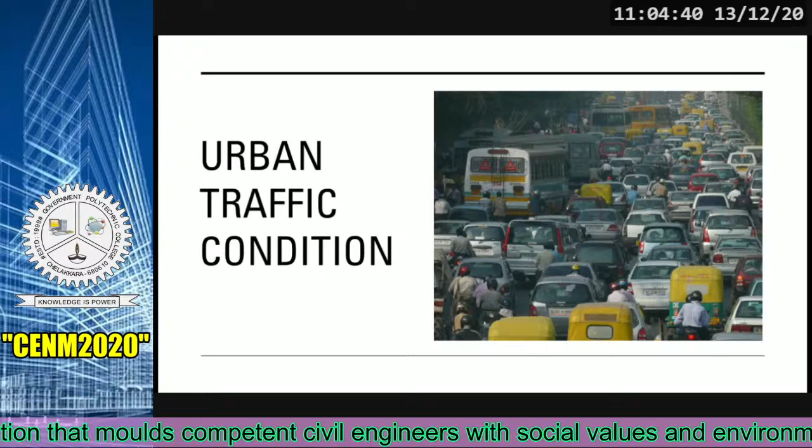Next, due to the high real estate values, the setout of the building will not be followed, and hence the destruction and reconstruction process will be a million dollar question.

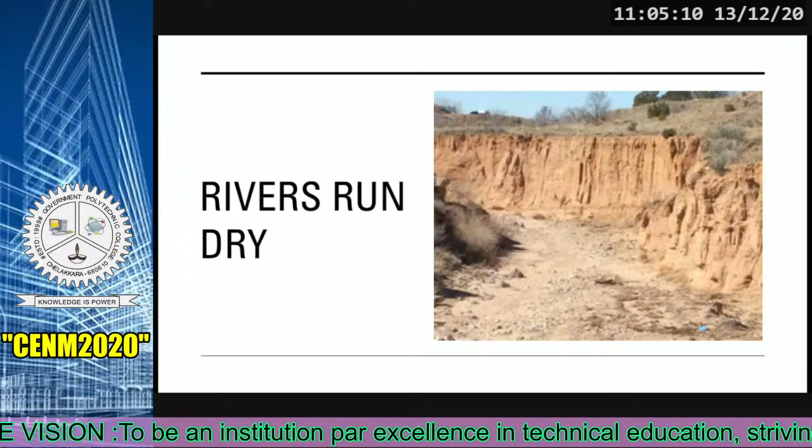Next, due to asymmetrical geographic conditions caused by man-made activities like interruption of water flow and unconnected water bodies, there will be a shortage of water in the construction industries.

Next, there is going to be a major problem: the skilled labor shortage. In this new millennium, life is cozier and every child of a laborer is educated, which is good in one way, and hence there arises a shortage of skilled labor.

In the field of construction industries, theoretical studies will only help to model a structure, but they do not help in field work. Construction practices are done by laborers, but not by engineers. In the future, there will be a majority of engineers, but not laborers.

Next, there are a lot of issues that are going to be faced in civil engineering in the future. Where there is a problem, there is also a solution. The best solution to have a better civil engineering in the new millennium is artificial intelligence in the construction industry.

First of all, what do we mean by artificial intelligence? Artificial intelligence is defined as the ability of a computer program or machine to think and learn. It's nothing but a branch of computer science building smart machines capable of performing tasks that typically require human intelligence.

It can be said that human intelligence is equal to artificial intelligence. Then what are going to be the processes involved in artificial intelligence?

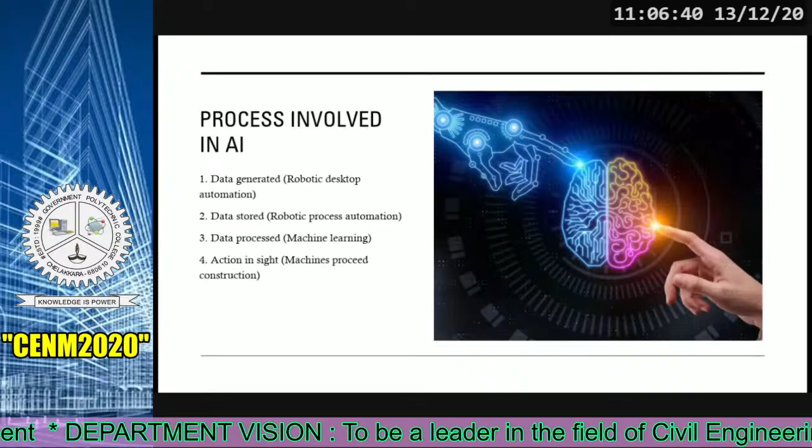The process like data generation: the requirement of work to be done will be generated as data, and the data will be converted into algorithms. The algorithms will be stored in the memory chips present in the robot, as like as the human brain. The stored data will be processed, and that's termed as machine learning.

After the processing of data, the robots will be sent to site in order to expose to more data by using big data analysis. And in the final stage, the performance of the task, the action, will be achieved.

Next, we have to know certain technical terms in artificial intelligence. First, the algorithm. Algorithm is a robotic language, as how we have a language.

In this, the generated data will be converted into algorithm codes in the memory chips of the robot in order to progress the work. First, the data will be converted into algorithms, which will be inserted into the machine, and the machine works according to the algorithms.

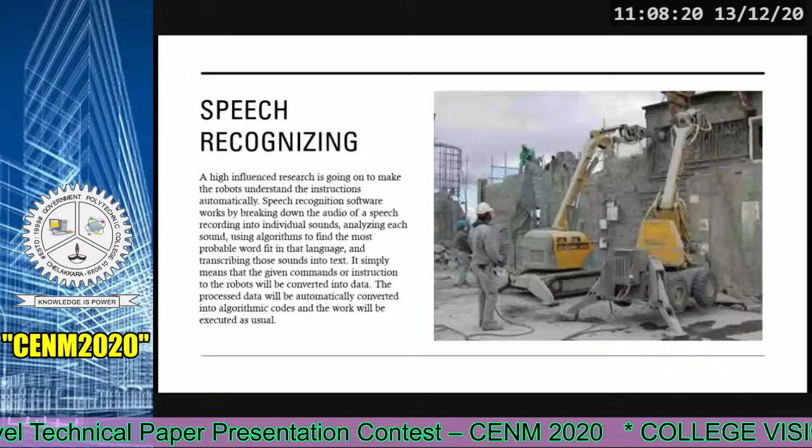Next, speech recognition. High research is going on towards speech recognition, as in how humans speak, in which the software works according to the audio of the speech and individual sounds. The sounds will be analyzed by breaking them into phonetics, using algorithms to find the most probable word to fit the language, and transcribing the sound into text.

It simply means that the given commands or instructions to the robots will be converted into data. The processed data will be automatically converted into algorithm codes, and the work will go on as usual.

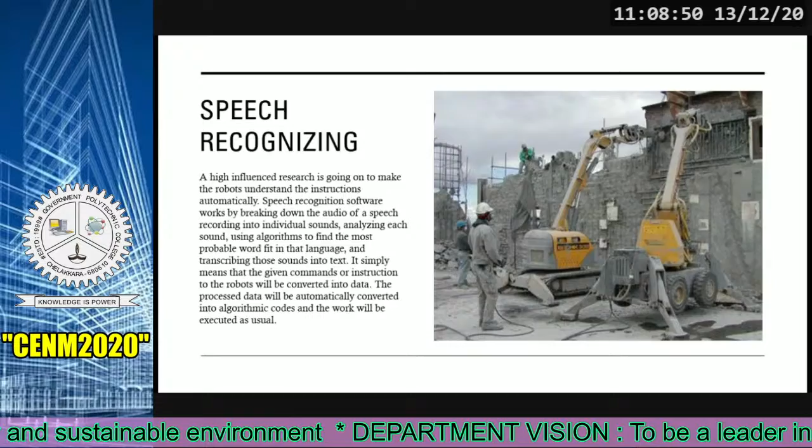As I've already said, field practice to the robots: without being explicitly programmed, a machine becomes capable of understanding and providing insights by exposing it to more data. This study technique, allowing a robot to acquire machine learning, makes the robot acquire some novel skills to adapt to the environment. Next, how artificial intelligence relates to machine learning and deep learning.

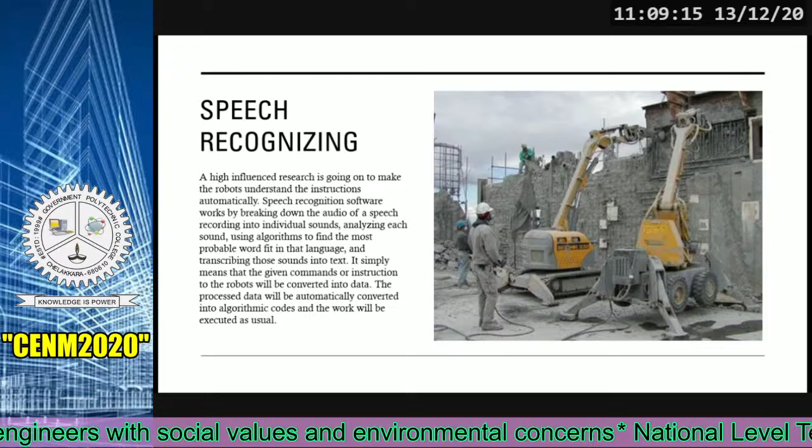Deep learning is the process in which speech recognition and image recognition are done. Humans can analyze images, but robots could not. The robot analyzes only the images which are in BIM, building information modeling.

The required data will be converted into images in BIM software, then it will be implemented to give instructions.

Then how is artificial intelligence used in the construction industry? It is used for constructing prefabricated buildings, which are factory-built buildings, having a lot of advantages like time and cost efficiency, and an easily transportable solution for labor shortage, etc.

Then what is 3D printing? 3D printing is a process in which a mechanical arm constructs a building. The building is not made through bricks, but rather with a paste of concrete, aluminous materials, and plastics in a fixed ratio.

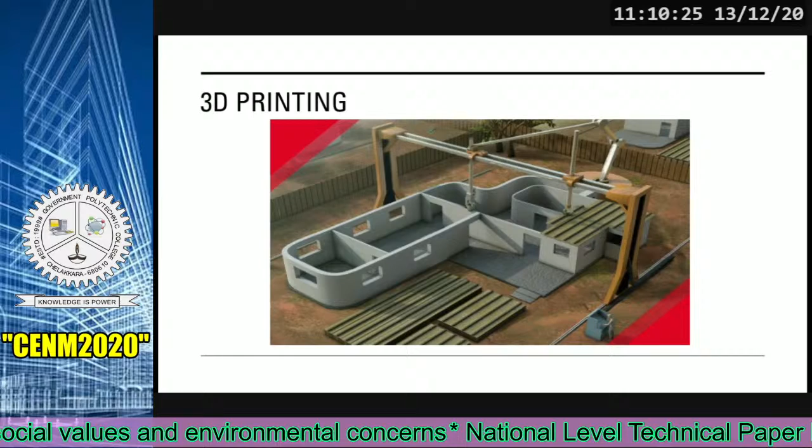Next, 3D surveying and monitoring: drone surveying. In this process, the principles of triangulation are followed by using GPS and satellite images, with the cloud software. The robots will be connected with drones and drone chips, and the monitoring will be done through drones.

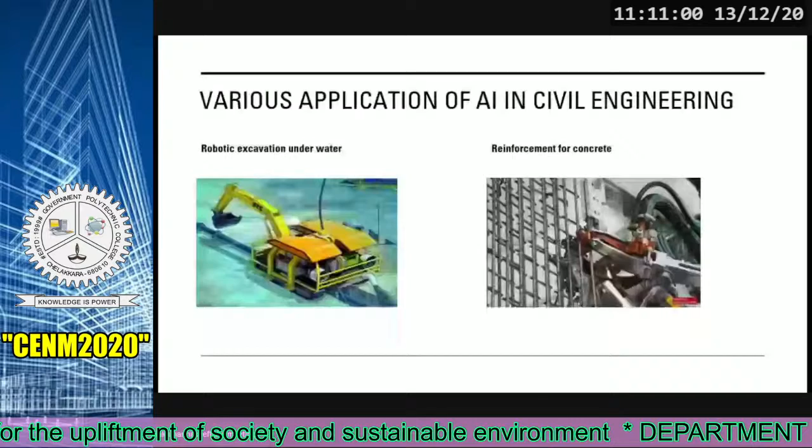Next, the various applications of artificial intelligence like brick masonry, robotic demolition, excavation underwater, reinforcement of concrete, compaction underwater, and robotic blasting. These are the various present applications, which can also be said as the result I'm giving here.

Next, what are the advantages? At the site, engineers have speech understanding, they have novel skills, they can work in remote places, there are no expensive errors, and there's 24-hour working. These are the lot of advantages of artificial intelligence in the construction industry.

There are also certain downsides of artificial intelligence in the construction industry: high requirement of initial capital, and failures in working other than as programmed. But these disadvantages are also being rectified by using the process of machine learning and deep learning, and research is going on to produce construction 4.0.

Right now, I'm going to conclude. There are lots of issues that are going to be faced in civil engineering in the upcoming days. By analyzing these problems, we can conclude that by utilizing artificial intelligence in the construction industry in future, we can rectify all these problems.

The conventional technologies are already being replaced by artificial intelligence according to the needs. Survival of the fittest is the all-round theory followed in the world. As future civil engineers, we should have complete knowledge of these AI construction technologies to implement and achieve better construction.

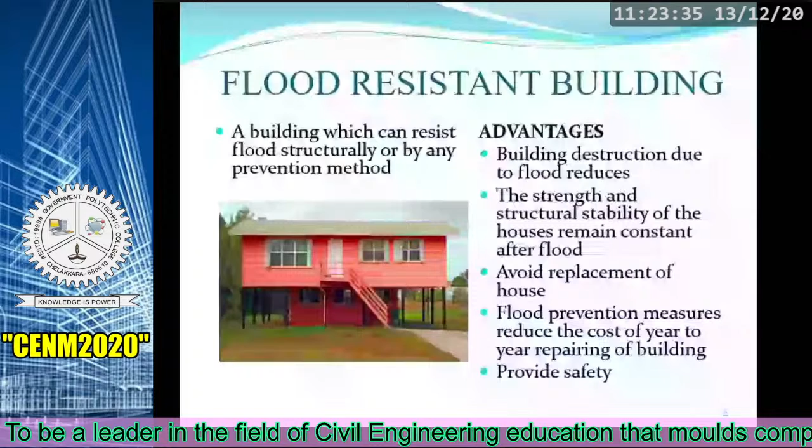Types of flood-resistant houses are: sacrificial ground floor, stilt house, raising house, and flood-proofing. The first one is the sacrificial ground floor house, a building with a raised ground floor. The residential area is arranged above, and you can give the ground floor as basement storage. It will limit space and work for medium level flood conditions.

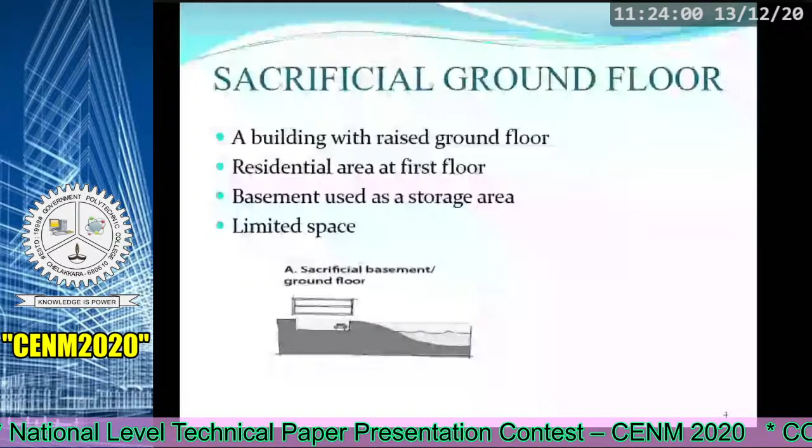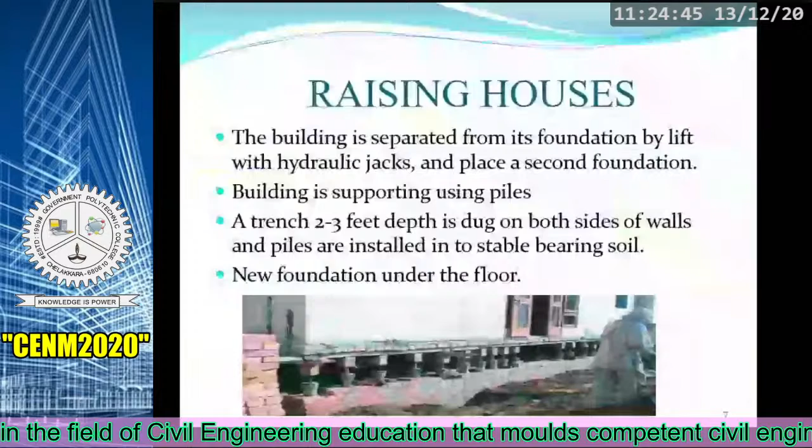Most people use raising houses to protect their homes. The principle of raising houses is that the building is separated from its foundation by lifting it with hydraulic jacks and placing a second foundation beneath it. The first step of raising a house is inspecting the area. Then, a trench 2 to 3 feet deep is dug on both sides of the walls and piles are installed into the stable bearing soil. When the foundation is lifted up by 1 foot, you can make the new foundation beneath it.

Next is wet flood proofing. Wet flood proofing is when flood water enters the structural area. Here you can see in the figure, focus on the foundation, there are some openings. These openings allow the flood water to enter the basement, where the basement acts as a structure.

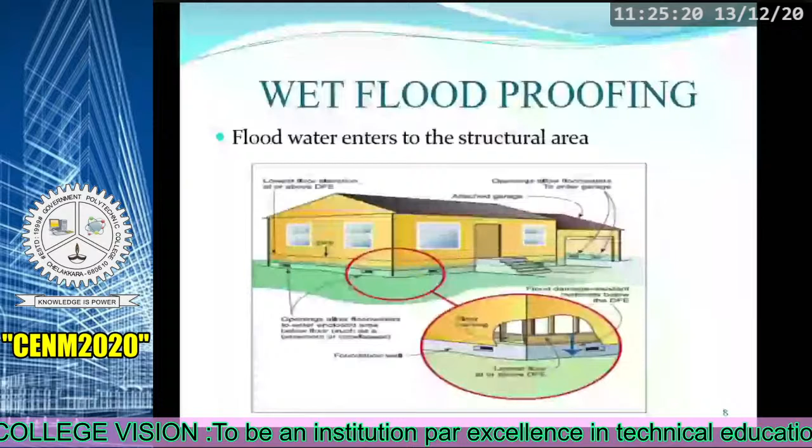About the elevation of the building, the lowest floor elevation should be at or above the design flood elevation. The materials used for constructing a wet flood-proof house are floodwater resistant materials.

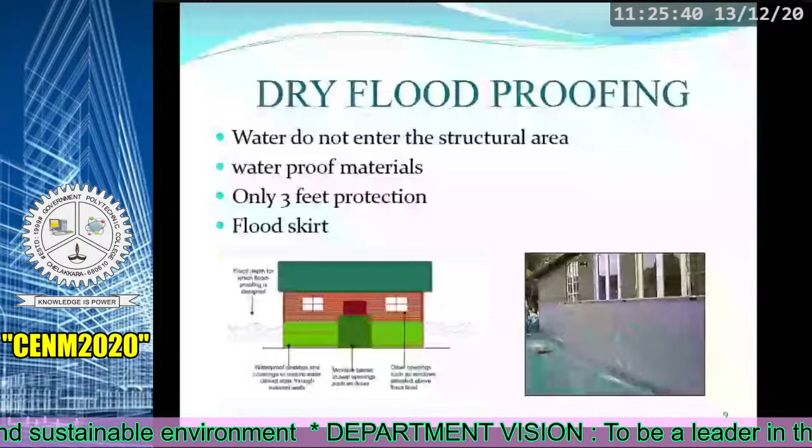Then dry flood proofing. Dry flood proofing is just the opposite of wet flood proofing. Water does not enter the structural area. Waterproof materials are used for constructing dry flood proof houses. Only 3 feet of protection is allowed for these houses.

Flood skirts are provided. In the second figure, you can see what a flood skirt is. Focus on the first figure - compared to a common house, the elevation of the windows is higher, and a mobile barrier is fixed to seal openings such as doors. You can use flood doors also for this purpose.

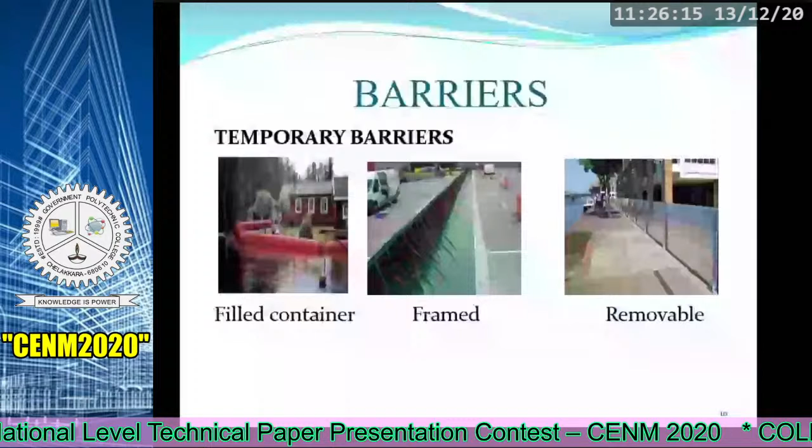Then the next method for preventing flood is barriers. Barriers are of 3 types: temporary barrier, flood wall, and levees. Temporary barrier is also classified into 3 types: filled, framed, and removable. First one is the filled container.

You can see the barrier in the figure. These barriers do not allow flood water to enter the structural area. They properly manage the wave action of the flood.

The second type is the framed barrier. You can see green and orange colors - this is known as the supporting frame. And these long sleeves reduce the seepage of flood waters towards the building.

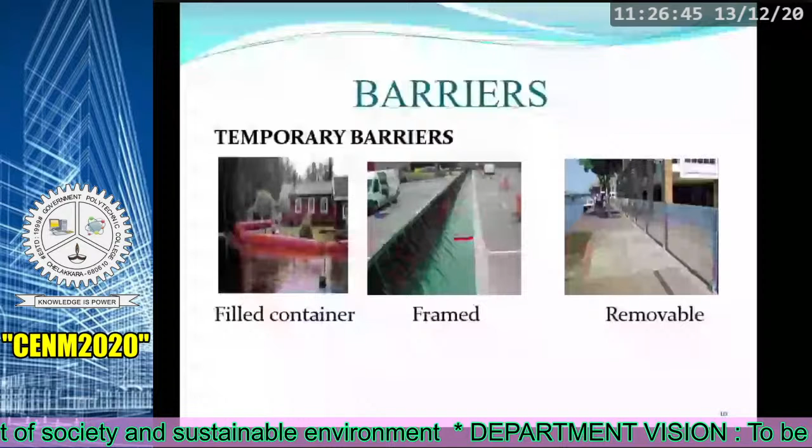And last is the removable barrier, which diverts flood water from one place to another place.

Then the second type in barriers is the flood wall. A flood wall is an engineering construction, built 1 foot to 4 foot around the structure. It's cheap and concrete masonry is used for the construction.

Last is levees. Levees are a designed construction, a traditional method using earth materials. The first step of making a levee is excavating, then making an impermeable core layer by layer to construct the levee.

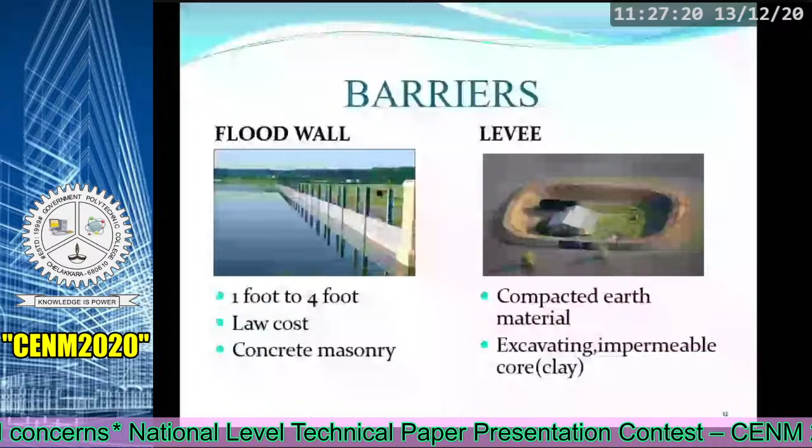For special flood-resistant houses, we need special materials. These materials are classified from class 5 to class 1. Class 5 and class 4 materials are flood-resistant materials. Compared to class 5 materials, class 4 is less durable.

Example for class 5 material is cast stone block. Example for class 4 material is steel metals. Then class 3 materials are water-resistant materials, not flood water resistant. Example for class 3 material is wood fiber and plaster.

Class 2 and class 1 are used in dry lands. These materials are not resistant to water. Example for class 2 is green board, and example for class 1 is plywood mastic flooring.

Then some other methods are used for flood prevention. Fences are a temporary protection to the building - they divert flood water from one place to another, acting as a barrier.

Then site selection - check the site in flood maps to see whether it is located in a flood prone area. Then tanking - you can see a figure.

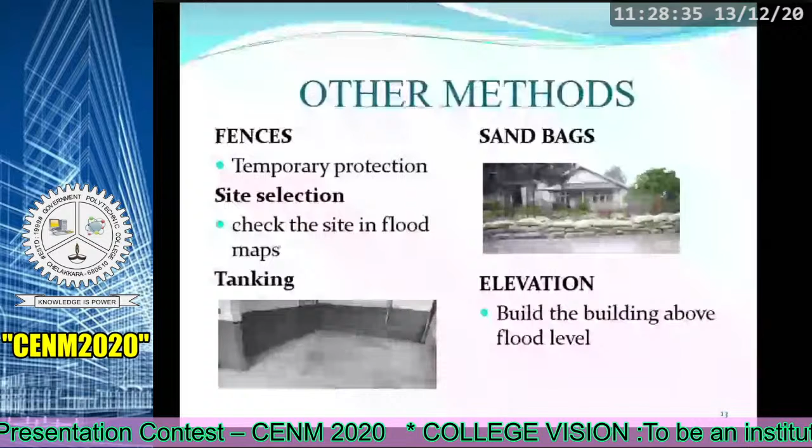Tanking is nothing but a tanking slurry which contains an organic compound. Due to this organic compound, wherever the slurry is applied, we get an adhesion property and high tensile strength. Usually we provide tanking slurry to floors, walls, and basements.

Then sandbags - all of you know what sandbags are. Fully filled sandbags can be used as a medium level of flood protection. Elevation of the building is the most important point. Building above the flood level is the best method to avoid flood problems to the building.

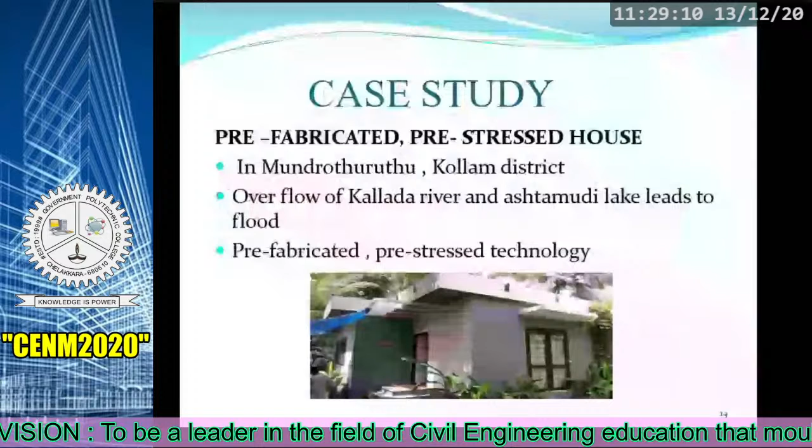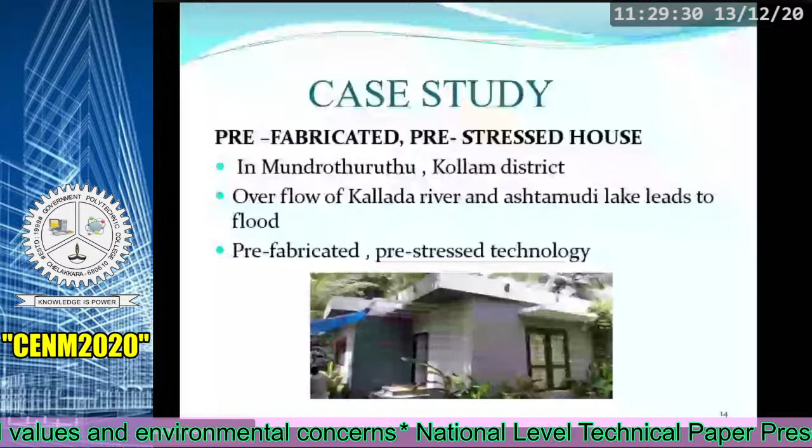Now moving on to a case study. In Kollam district, Mundrothuruthu village, overflow of the Kallada river and Ashtamudi lake leads to flood problems here. The TKM engineering students decided to construct a flood-resistant house known as prefabricated pre-stressed technology. Prefabricated technology means the assembling of components used for construction of the structure at the site, and pre-stressed technology means the cement is given pre-stress at the production time.

At the production time, we give compression to these cements. Due to this compression, the cement gets high properties, high yield, and good strength.

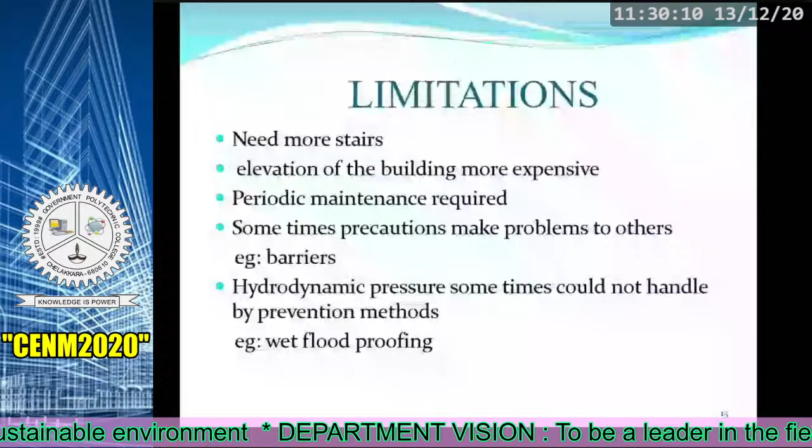Every invention has some limitations. Flood resistant houses have some limitations too - more stairs, and elevation of the building is expensive, periodic maintenance is required. Sometimes precautions make problems for others - for example, barriers and hydrodynamic pressure sometimes cannot be handled by prevention methods like wet flood proofing.

In my own way, good treatment towards the environment is the best option for avoiding flood problems - afforestation, restoring water resources, making ways to store water like rainwater harvesting pits, and proper sewage treatment. In Kerala, most flood problems are due to Western Ghats destruction, which all of you know about.

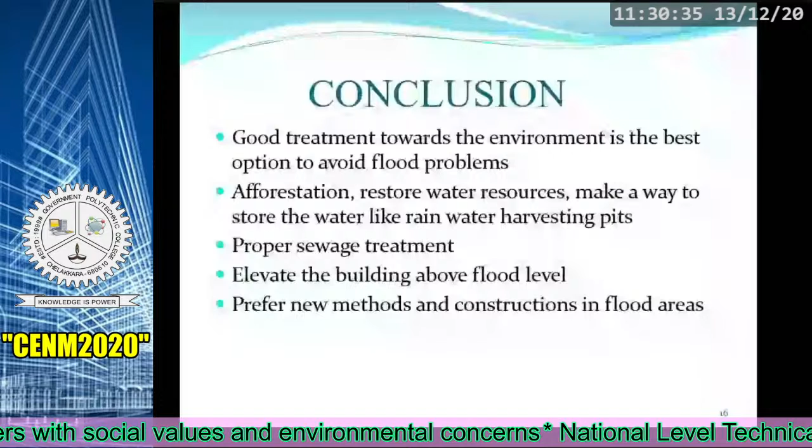Elevating the building above the flood level is the best option for avoiding flood problems. Prefer new methods and construction in flood prone areas - it's a good idea for reducing flood damages. I strongly believe you got something about flood and flood resistant buildings. I hope it will help in your future. These are my references. Thank you for listening to my words.

Okay, Arya, it was really nice presentation and a very relevant topic. Sinu ma'am, would you like to ask some questions? Yes.

Arya, it was a good presentation. My question is that in your case study, you told about prefabricated technology - that students of TKM Kollam Engineering College made a house with prefabricated technology. What materials are used in that?

Pre-stressed cement and concrete are used for the construction. Okay. Do you know the grade of concrete used?

I don't know, ma'am, I haven't referred to that. I only referred to pre-stressed technology. Cement is the most durable and strengthened material.

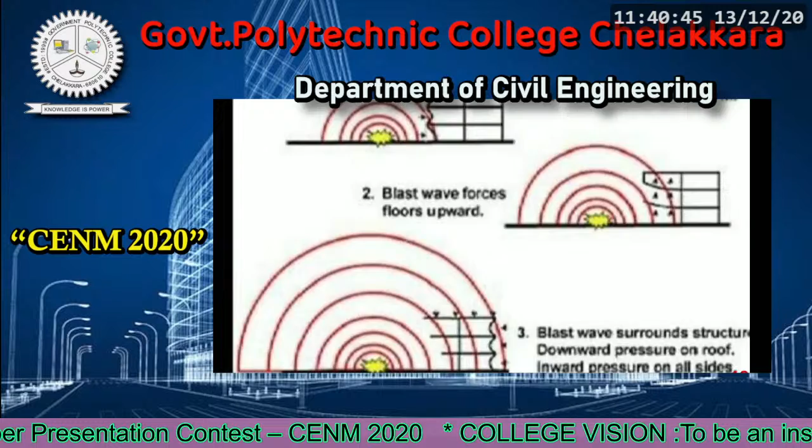In blast load, overpressure increases to peak value and decays to atmospheric pressure, and the energy is formed. This blast energy converts into thermal energy radiation.

Treatments are provided to various parts of a structure to improve the blast resisting mechanism. We construct building planning and layout using standoff distances to minimize intensity of damage. In more built-up places like Mumbai, buildings cannot provide standoff distances, so we provide trees, street objects, and furniture used as obstacles.

A 13-meter distance from building to road. In standoff distances, we provide obstacles as blockades, planters, fountains, fences, etc. This allows only emergency vehicles, and we construct the building raised 2 meters above ground level.

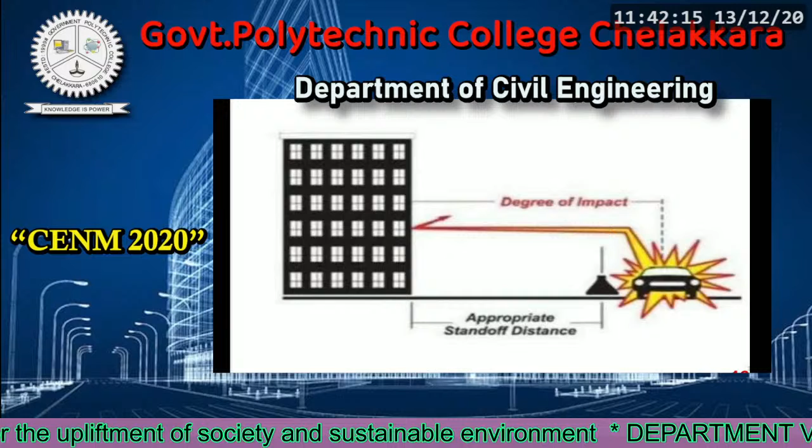It is the picture where we can see standoff distances. Roofs, arches, and domes have more capacity to resist blast compared with cubical or rectangular forms. In these shapes, multiple reflections are experienced.

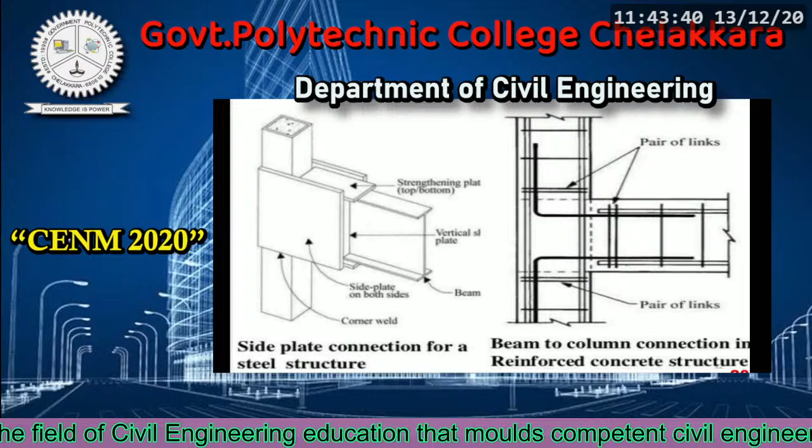Then next is shear wall. It is used as a lateral load resisting mechanism in the horizontal direction. It will protect from seismic and blast loads. This kind of wall is constructed in our nearby places also.

Then glazing and cladding, we can see that in this glazing and cladding, inside the two glass layers there is a vinyl interlayer, and it provides resistance to small blast wind, air, rain, etc.

The conclusion is it is not practical to design buildings to withstand any conventional terrorist attack, but we can improve the performance of buildings. We cannot say we get 100% result, but we try to achieve it. Each day we try to construct threat resilient and protected buildings. Thank you.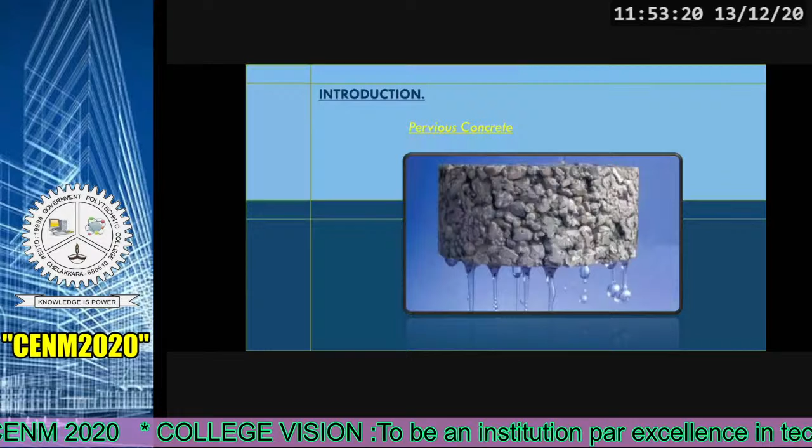Pervious concrete. What is meant by pervious concrete? As the introduction itself, we can see a figure. Pervious concrete is a special type of concrete with high porosity used for concrete flatwork applications that allows water from precipitation and other sources to pass directly through, thereby reducing the runoff from a site and allowing groundwater recharge.

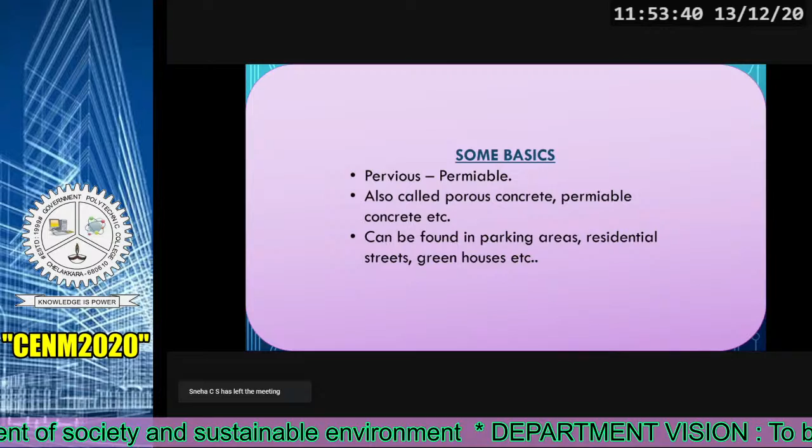Here we can see some basics of pervious concrete. Meaning of pervious is permeable. It is also referred to as porous concrete, permeable concrete, etc. Its modes of application are different. It can be found in parking areas, residential streets, greenhouses, etc.

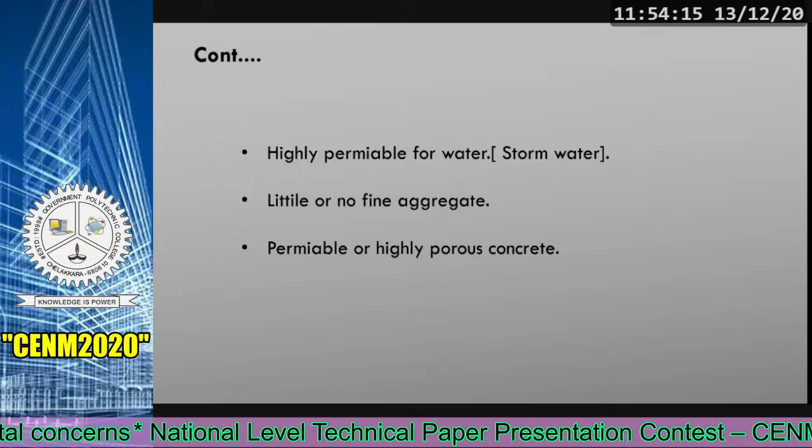Its main property is the permeability it is providing. It will surely restrict the water from getting stagnated, and the presence of fine aggregate is very few or can't be found in it. It's also a highly porous concrete.

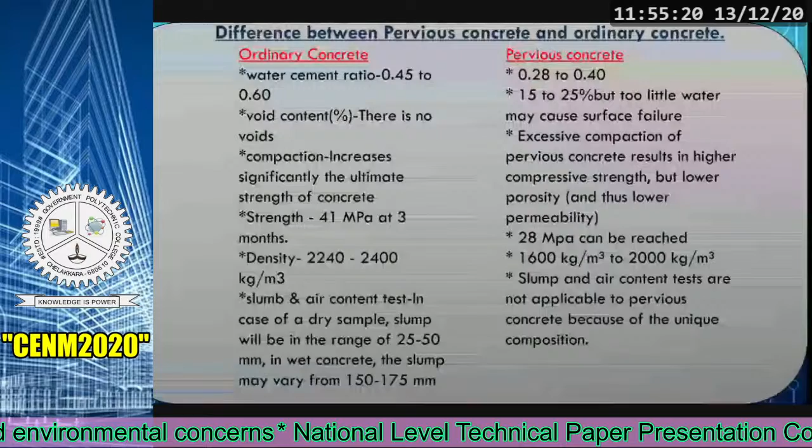Here you can see a difference charted between pervious concrete and ordinary concrete. Water to cement ratio in ordinary concrete is 0.45 to 0.60, whereas in pervious it is 0.28 to 0.40. Coming to void content, there are no voids in ordinary concrete, but there is 15 to 25% in pervious concrete. In case of compaction, it increases the ultimate strength of concrete in ordinary, while excessive compaction in pervious results in higher compressive strength but lower porosity, which also lowers the permeability. Density range of ordinary concrete is 2240 to 2400 kg per meter cube, and in pervious, it ranges from 1600 to 2000 kg per meter cube.

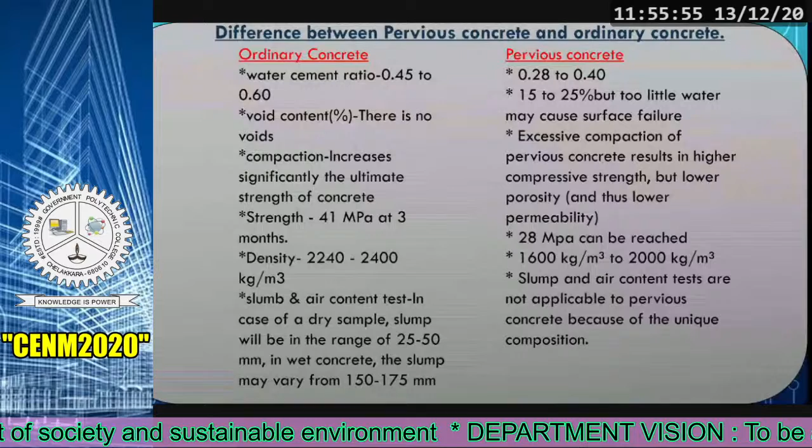Ideal slump and air content test in case of dry sample in ordinary concrete - slump will be in the range of 25 to 50 mm, and in wet concrete it may vary from 150 to 175 mm. On the pervious side, slump and air content test is not applicable because of the unique composition.

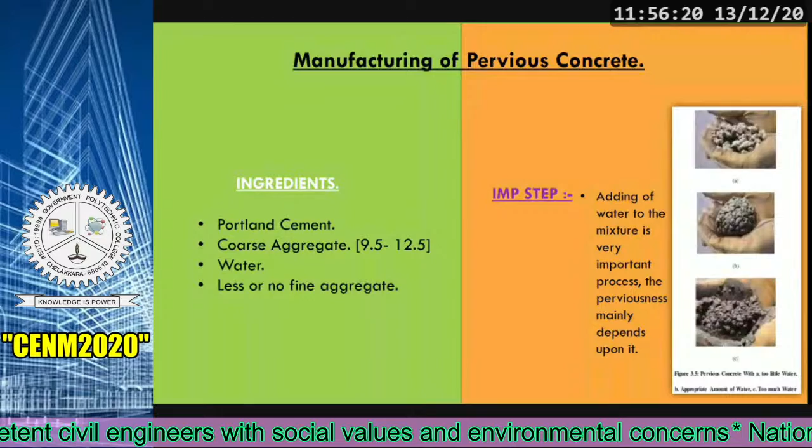Now it's time for the manufacturing of pervious concrete. Before that, we want to consider the ingredients in it - Portland cement, coarse aggregate, water, and also fine aggregate with a lesser quantity or none. One important step to keep in mind during preparation is the adding of water - appropriate amount of water is only needed for mixing. You can also go through the figures given.

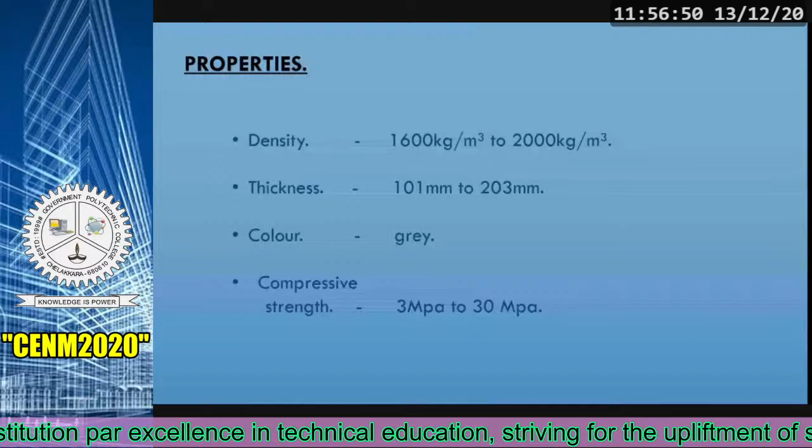Properties. Some of the main properties of pervious concrete are: first, density - it has a minimum value of 1600 kilogram per meter cube to a maximum value of 2000 kilogram per meter cube. Second is thickness - its minimum and maximum required is 101 millimeter and 203 millimeter respectively. Third, on appearance, it is gray in color. Fourth, its compressive strength ranges from 3 megapascal to 30 megapascal.

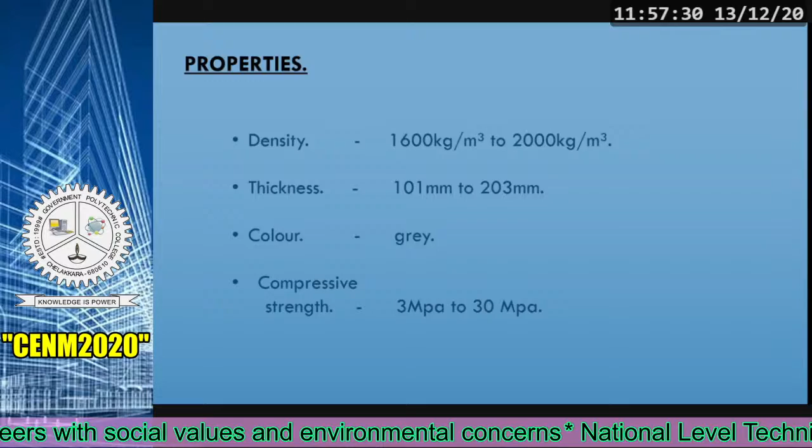Pervious concrete also follows certain conditions. Firstly, it has an ideal temperature of 5 to 26 degrees Celsius. High humidity also favors the mixing of this concrete.

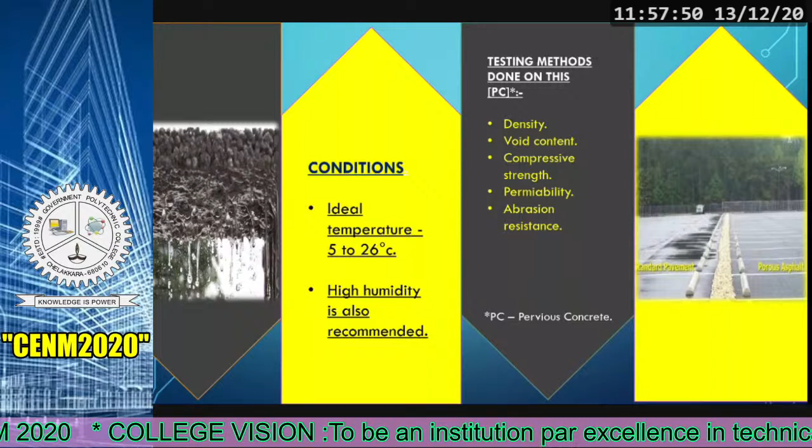As with standard concrete, pervious also goes through the following testing methods: density, void content, compressive strength, permeability, abrasion resistance, etc. Figures of pervious concrete are also included here.

Now, environmental benefits. Moving on to the environmental benefits, pervious has a lot. Some of them are: first, it clearly reduces stormwater runoff. It also regulates water management practices. Pervious is also able to mitigate the surface pollutants present in it. At last, by its property and structure, it recharges the groundwater level.

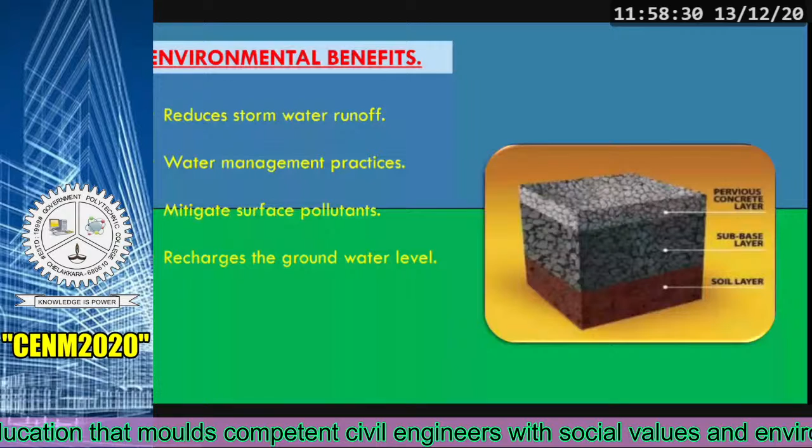A section of pervious concrete is also provided in the figure. The bottom layer consists of soil layer, and above the soil, a sub-base layer is added, and above that a pervious concrete layer is also added.

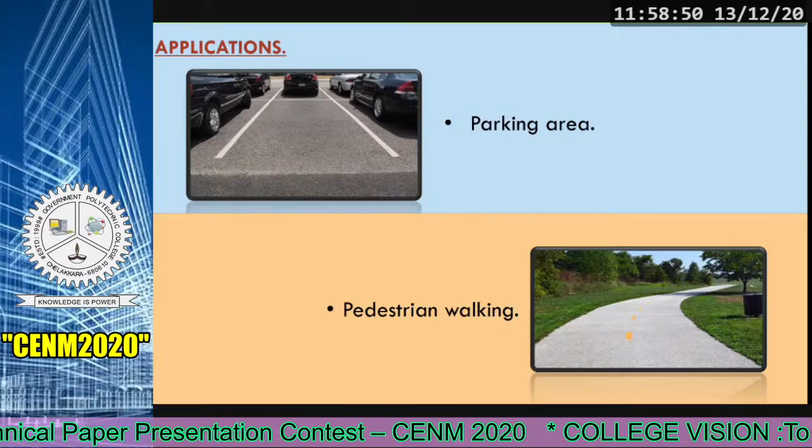Coming to applications, it has numerous applications to follow, but is only implemented in some countries. Some major applications are parking area, pedestrian walkway, greenhouse, tennis courts, low traffic areas, etc. These are all based on the idea that water will not get stagnated for long.

As with every material, pervious concrete also has advantages and disadvantages. Moving through the advantages, we can see that it directly recharges the groundwater table. It can control surface pollution. It is able to reduce surface temperature and thus heat island effects. It can also conserve nature by protecting streams, watersheds, and ecosystems. And a main advantage is that its installation is easy and it has a huge guaranteed lifespan.

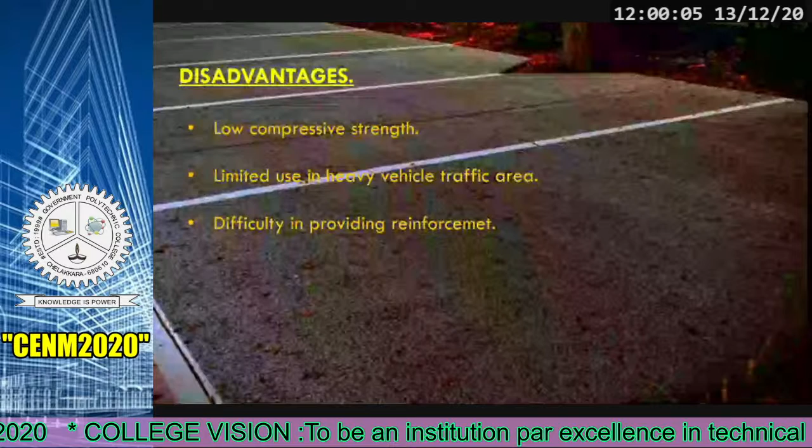On the other side, pervious concrete also has some disadvantages: it provides only low compressive strength, thus it is also limited in heavy vehicle traffic areas. It is also difficult to provide reinforcement in it. These are the leading disadvantages to be spotted.

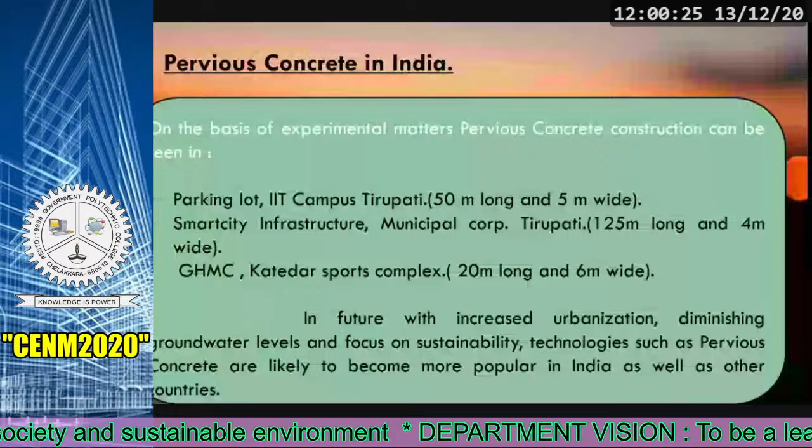Is there any pervious concrete construction in India? Definitely yes. We can find it in the parking lot of IIT campus, Tirupati, and the smart city infrastructure in Municipal Corporation of Tirupati also used this technology. Another one is in the Hyderabad Municipal Corporation's Katedar Sports Complex. These are all based on experimental studies going on with pervious concrete.

In the upcoming future, with increased urbanization, diminishing groundwater levels, and the focus on sustainability, technologies such as pervious concrete are likely to become popular in India as well as other countries.

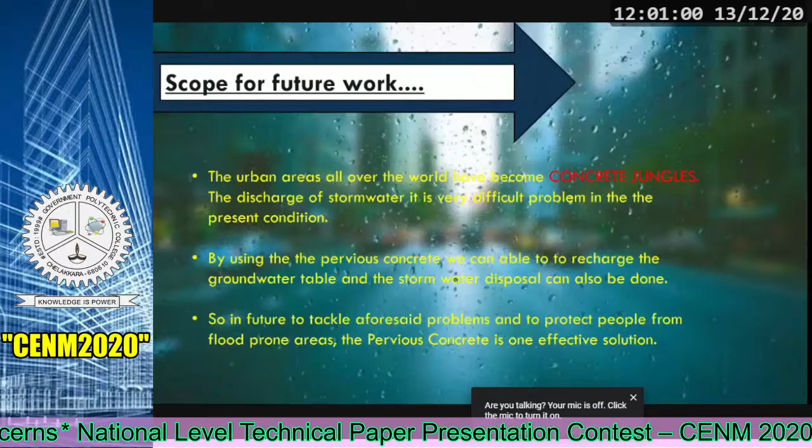Scope for future work: in the upcoming future, constructions based on pervious concrete will definitely increase. Now itself, urban areas all over the world have become concrete jungles - I repeat, concrete jungles. Through this solution of pervious concrete, we can recharge the groundwater table and manage stormwater disposal. So in future, to tackle these problems and protect people from flood prone areas, pervious concrete is one effective solution.

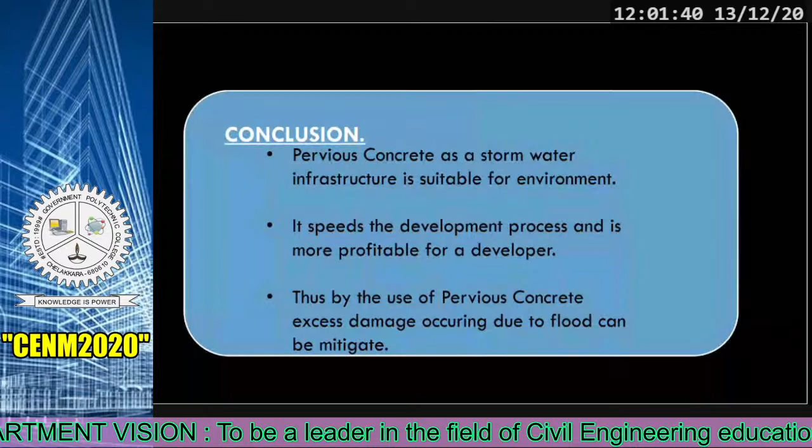Now it's time to conclude. Overall, pervious concrete as a stormwater infrastructure is suitable for the environment. It also speeds up the development process and is more profitable for a developer. It can also minimize the excess damage occurring due to flood. I hope you all understand the topic put forward by us. Studies and research are still going on for further developments. Thank you.

Okay Jishnu, it was really interesting presentation. Thank you ma'am. My friend Aravind will join for the question and answer section. Okay, please turn on your camera.

Can you hear me? Yes. Jisha madam, okay, do you have any questions? Yes ma'am, hi, your name? My name is Aravind. Jishnu and Aravind. Okay, good. Then Jishnu and Aravind will be answering for the session.

Okay, it's good. You have talked about pervious concrete being used in pedestrian walks or parking lots, etc. I think recent studies are going on regarding high loading areas too, and pervious concrete can be used in high loading areas also. Have you got any data regarding the performance of pervious concrete in the case of high loadings?

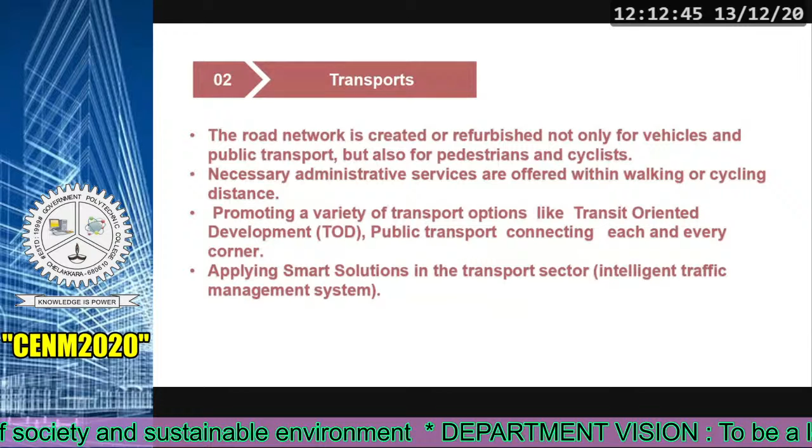Transports: the road network is created or refurbished not only for vehicles and public transport, but also for pedestrians and cyclists. Necessary administrative services are offered within walking or cycling distances, promoting a variety of transport options like transit-oriented development, with public transport connecting every corner.

Applying smart solutions in the transport sector like intelligent traffic management systems. Governance: e-governance and citizen participation, friendly and cost-effective, increasingly relying on online services to bring about accountability and transparency. Forming e-groups to listen to people, obtain feedback, and use online monitoring of programs.

Strategies in smart cities: retrofitting, redevelopment, greenfield development. Retrofitting means introducing planning in an existing built-up area to achieve smart city objectives along with other objectives, to make the existing area more efficient and livable.

Redevelopment will effect a replacement of the existing built-up environment and enable co-creation of a new layout. Greenfield development uses innovative planning, financing, and implementation tools.

Features of smart city: adequate water supply and assured electricity supply, sanitation including solid waste management, efficient urban mobility and public transport.

More effective data-driven decision making, enhanced citizen and government engagement, safer communities, reduced environmental footprints, improved transportation, increased digital equity, new economic development opportunities, efficient public utilities, etc.

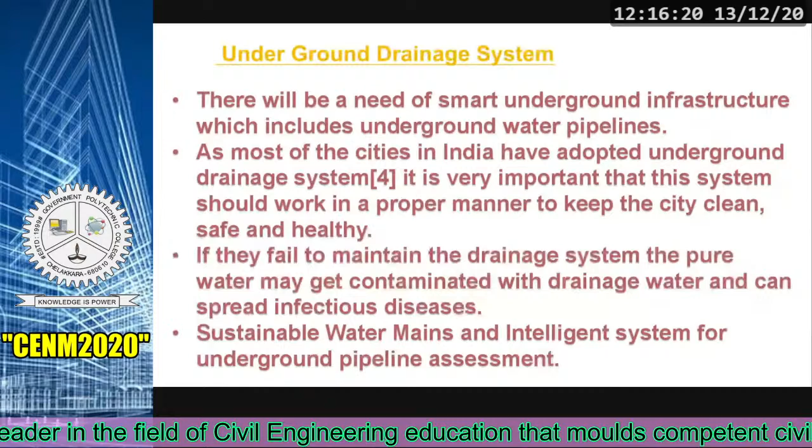There will be a need of smart city underground infrastructure, which includes underground pipelines. As most cities in India have adopted underground drainage systems, it is very important that the system works properly to keep the city clean, safe, and healthy. If they fail to maintain the drainage system, pure water may get contaminated and can spread infectious diseases.

Sustainable water mains and intelligent system for underground pipeline assessment. This diagram indicates the underground monitoring system. ARM7 is a microcontroller.

Flow sensor is used to measure the flow of sewage. Level sensor is used to measure the level of the sewage. Temperature sensor is used to measure the temperature of the sewage. Gas sensor is used to check whether any gas is added in the sewage.

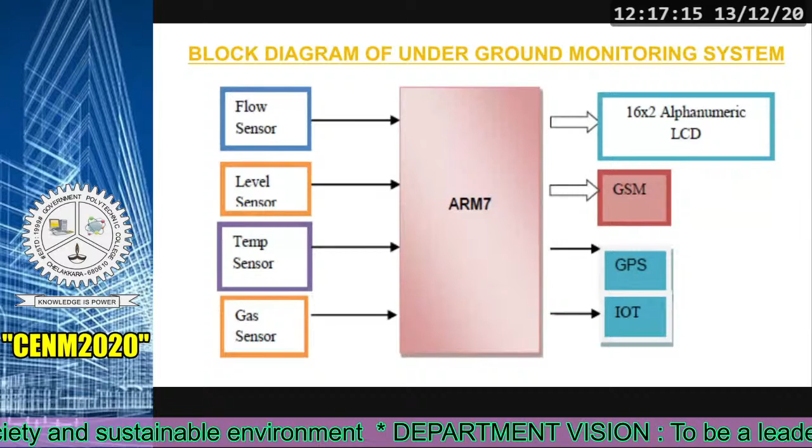GPS and IoT are used to control ARM7 from other places. GSM is a type of mobile used to get information from the microcontroller. The 16x2 alphanumeric LCD is used to display and input values.

Upscaling: urban living labs, demonstration, pilots, and small-scale implementation are in most cases used to test and develop solutions, changing real-world settings while taking into account local characteristics and circumstances.

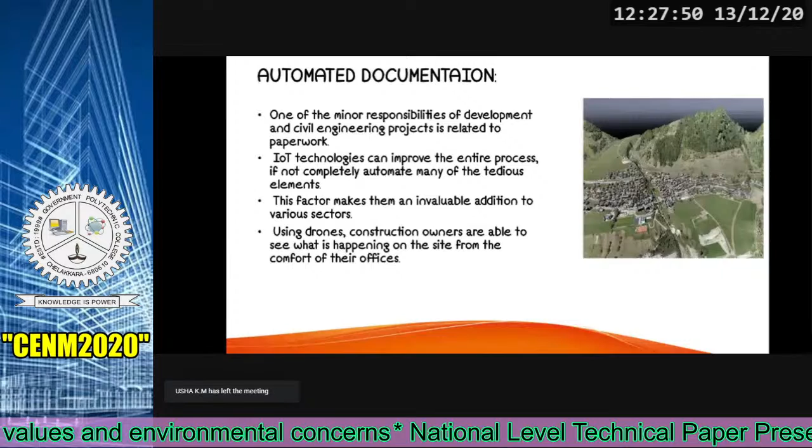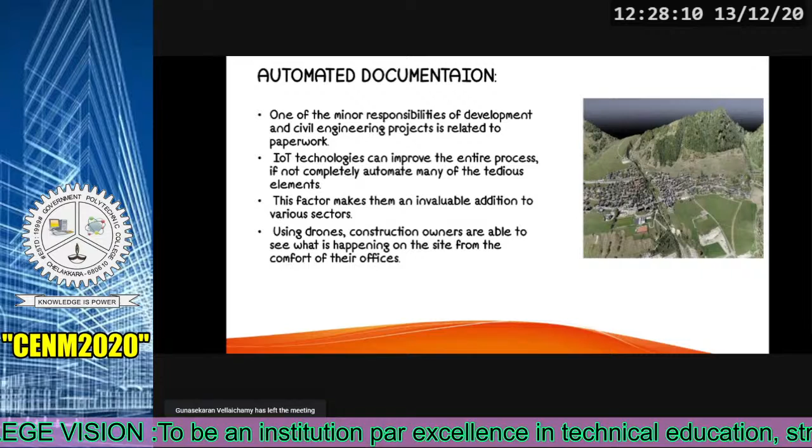Next, automated documentation. Automated documentation is one way IoT technologies can improve civil engineering. One of the minor responsibilities in development and civil engineering projects is related to paperwork. IoT technologies can improve the entire process, if not completely automate many of the tedious elements. Tedious means the hardest elements. This factor makes them an invaluable addition to various sectors. Using drones, construction owners are able to see what is happening on the site from the comfort of their offices.

IoT drones for civil engineering. In this topic, we are using smart devices to control drones in the construction field, monitoring workers on the field properly. Furthermore, the rollout of 5G technology is expected to enhance the ability of drones to react to commands in real time, enabling instant feedback. This is expected to increase their capabilities and performance.

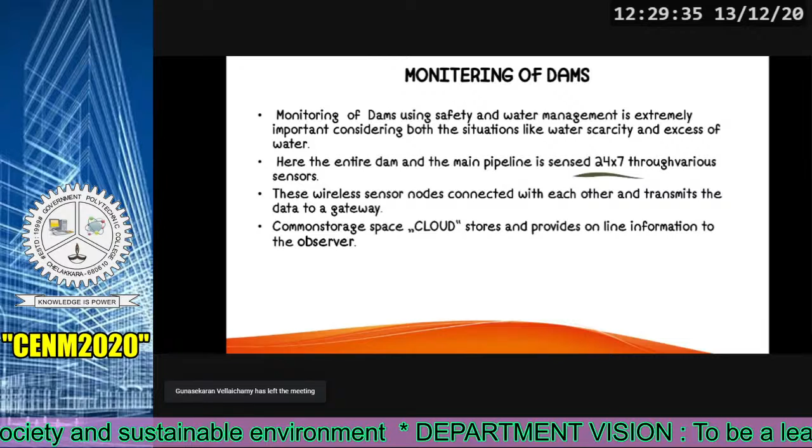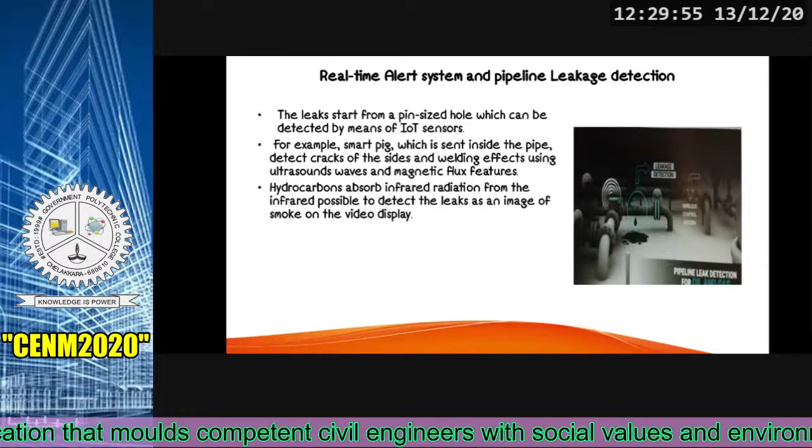Next, the real-time alert system and pipeline leakage detection. Leaks start from a pin-sized hole, which can be detected by means of IoT sensors. For example, a smart pig is sent inside the pipe to detect cracks and sites of welding defects using ultrasound waves and magnetic flux. Hydrocarbons absorb infrared radiation, making it possible to detect the leakage as an image of smoke on the video display.

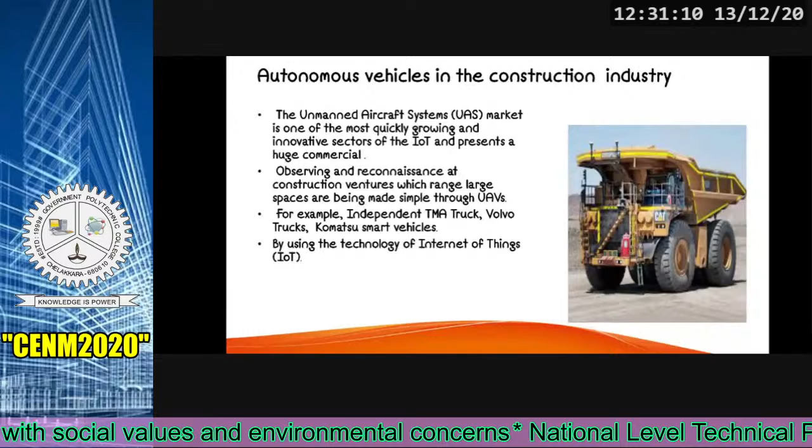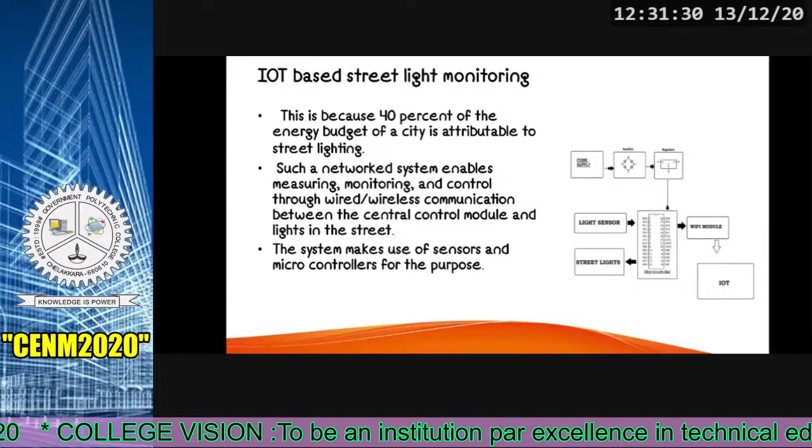Autonomous vehicles, IoT-based street light monitoring. This is because 40% of the energy budget of a city is attributable to street lighting. Such a network system enables measuring, monitoring, and control through wired and wireless communication between the central control module and the lights in the street. The system makes use of sensors and microcontrollers for these purposes.

Next, waste management using IoT systems. Waste management is a fundamental and compulsory consideration on an excellent building site. It is like a system to promptly clean junk at the place of work to reduce waste and lessen danger. Refuse levels must be restricted and expelled within a specific time.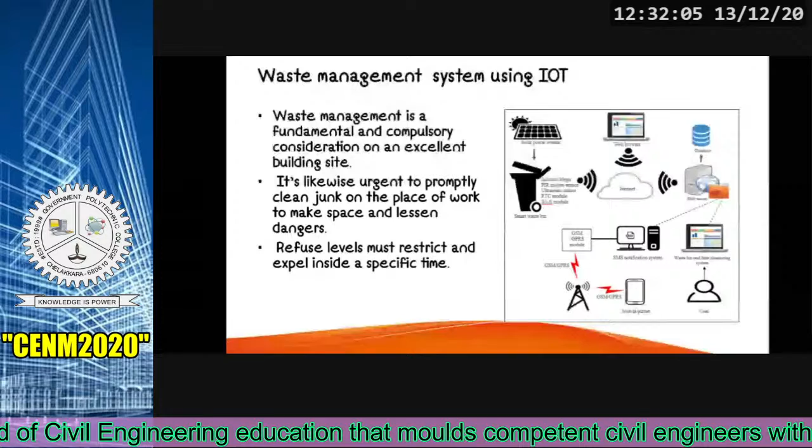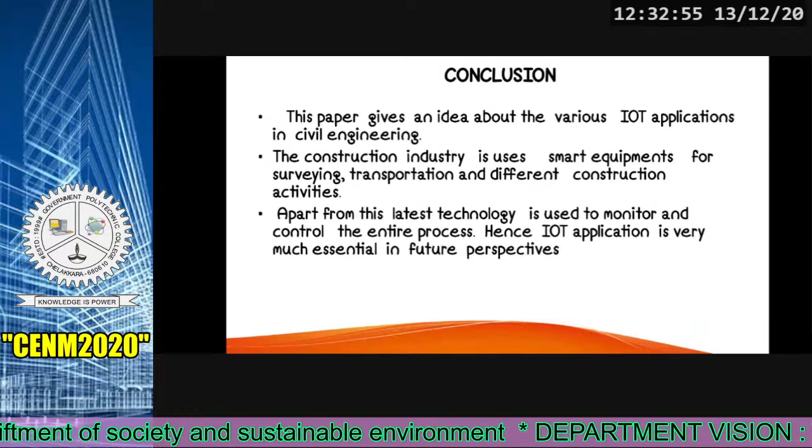In conclusion, this is about the topic of smart processes and various IoT applications in civil engineering. The construction industry uses smart equipment for surveying, transportation, and different construction activities. Apart from this, IoT is used to monitor and control the entire process. Hence, IoT application is very much essential in future perspective.

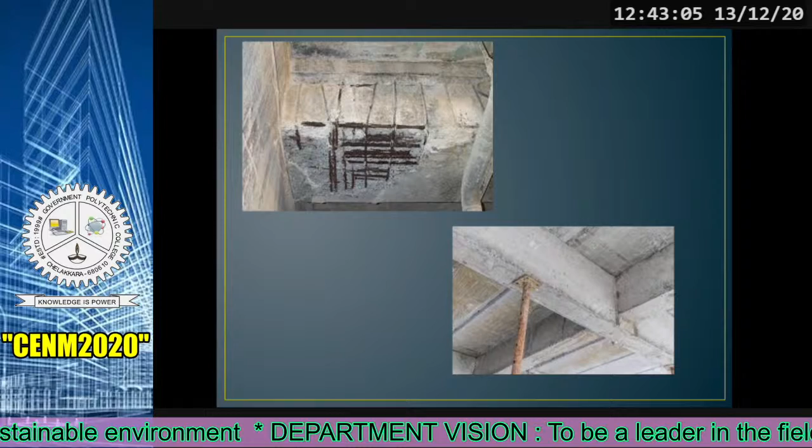Next topic is fixing suitable formwork. If repairs are required on vertical or overhead surfaces, and if the repair material is likely to sag, formwork will be required. The above picture shows how the formwork should be done at the field.

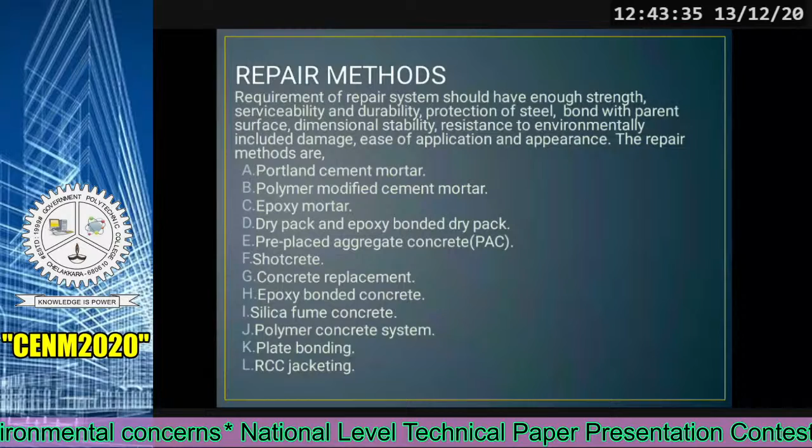Next we see the repair methods. A repair system should have enough strength, serviceability and durability, protection of steel, bond with the parent surface, dimensional stability, resistance to environmentally induced damage, ease of application, and appearance. Some of the repair methods include Portland cement mortar, epoxy mortar, polymer modified cement mortar, shotcrete, and concrete replacement.

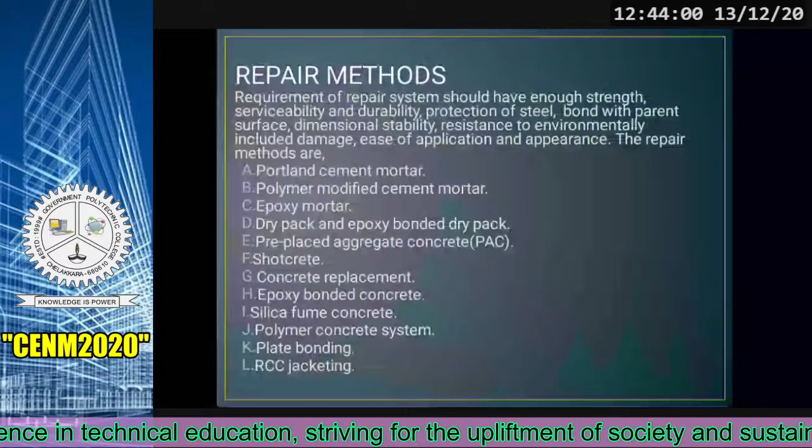From these, we will see two types, and the first is shotcrete concrete. Shotcrete is defined as pneumatically applied concrete or mortar placed directly onto a surface.

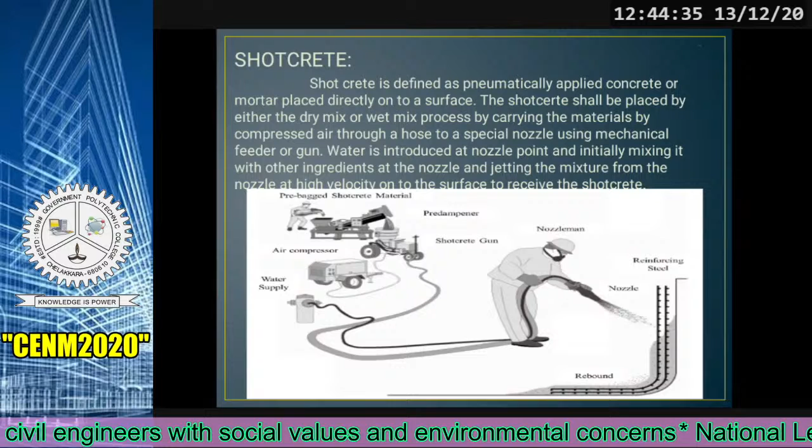Shotcrete is placed by either a dry mix or wet mix process, carrying the materials by compressed air through a hose to a special nozzle using a mechanical feeder or gun. Water is introduced at the nozzle point and initially mixed with other ingredients at the nozzle, jetting the mixture from the nozzle at high velocity onto the surface to receive the shotcrete. The above diagram shows how the shotcrete process is done in the field.

In our locality, there is a dam at Pollachi, the Aliyar Dam. Before 2 years, there was a problem at the dam, and it was rectified using this type of process only.

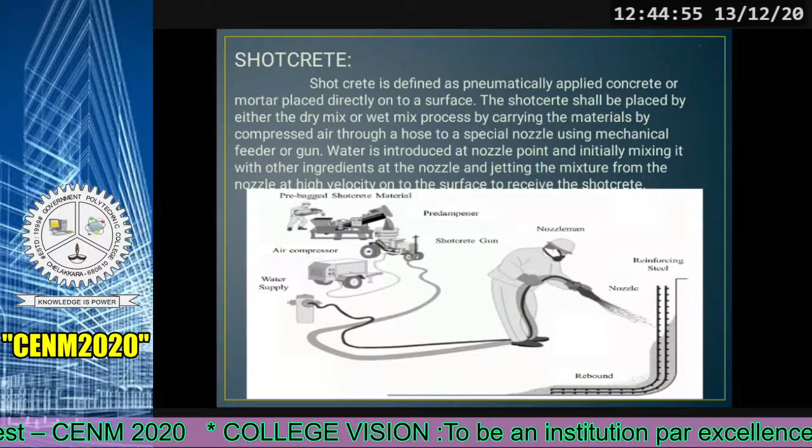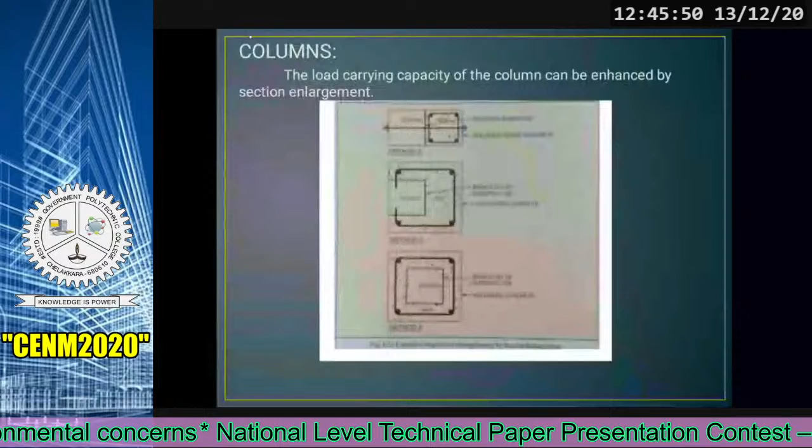First topic is about columns. The load carrying capacity of the column can be enhanced by section enlargement. The below figure shows the additional reinforcement provided to enhance the size of columns to withstand the load.

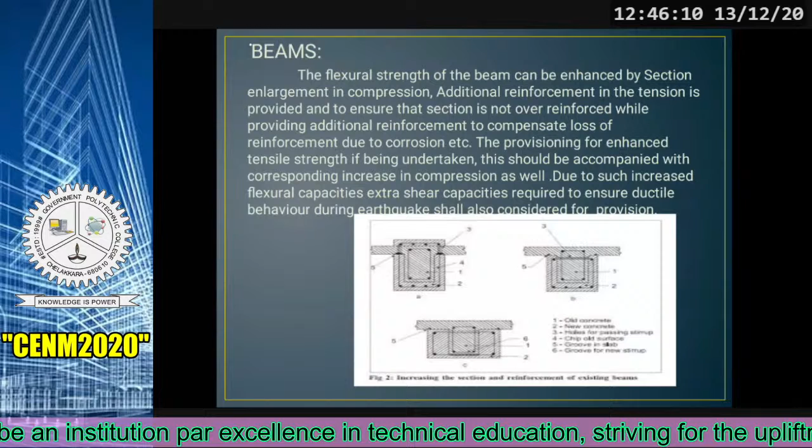Next is about beams. The flexural strength of the beam can be enhanced by section enlargement. In compression, additional reinforcement in the tension zone is provided, and to ensure the section is not over-reinforced while providing additional reinforcement to compensate for loss of reinforcement due to corrosion, etc.

The provisioning for enhanced tensile strength is undertaken, and this should be accompanied by a corresponding increase in compression as well. Due to such increased flexural capacities, extra shear capacity is required to ensure ductile behavior during earthquake, which shall also be considered for provision. The below figure shows these aspects taken into account.

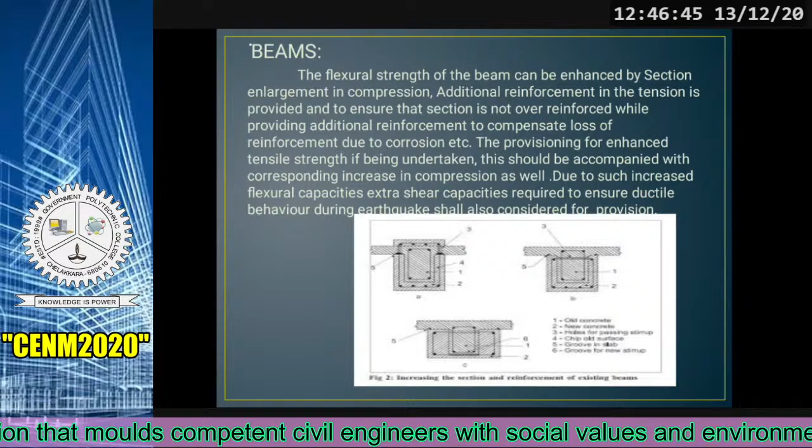Hello? Yes, ma'am. Hello? Ms. Shanjini, are you presenting now? Yes, ma'am. Ma'am, it is audible. Hello? Ma'am, is it audible, ma'am? Yeah, now it's audible. Okay, ma'am.

Slabs. The performance of the slab can be improved by...